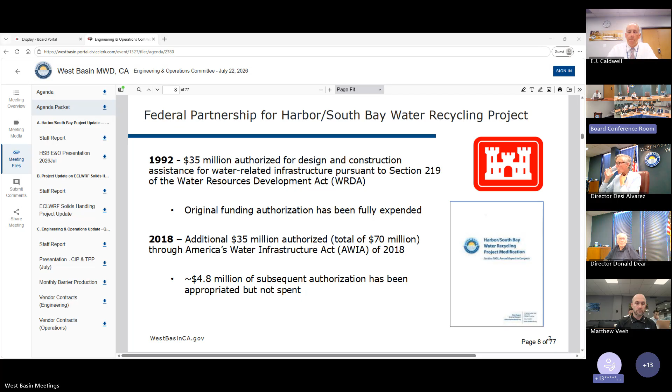Once we do the design, we'll be able to know exactly what the actual alignment will be. Next, yeah, the plan's already on there. Let me see the executive summary.

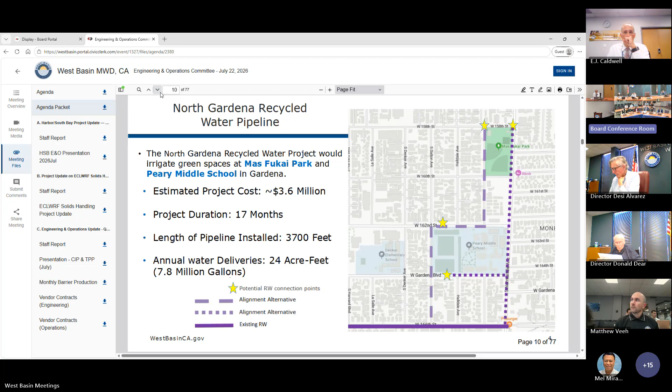To fund these projects required assembling together a number of different sources. The major portion came from federal funding appropriations of $4.8 million. However, that program requires a 25% local cost share, so we made up that cost share by securing some state grant funding through the Department of Water Resources, as well as some local funding commitments.

So this funding source, the state grant, is the one at risk now, and that's why we're presenting this item this month. Just to go through the details, the state grant funding through IRWM Proposition 1 Round 2, we received a $1.3 million grant from DWR.

This was a disadvantaged community involvement program project. This is important because normally there's a 50% cost share, so we would have had to come up with $650,000 of our own. However, because of that specific program, that cost share is waived, so we get the full $1.3 million without having to do any additional cost share.

Several years ago the board authorized the submittal of the application and accepting the terms of the grant, and since then we've been submitting quarterly updates as part of this grant. Obviously there's been very little progress, and that's why LA County has brought it to our attention that we need to make progress on this source of funding, or they could potentially take the grant away from us.

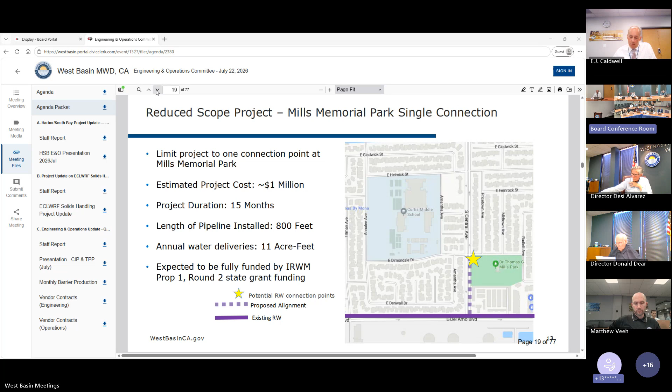The grant right now is for 1.3 million. The 1 million seems to cover the work there. So, having other contributions from potential aids might be able to help us to fully fund the project.

So again, this is just a rephrasing of what Matt had already mentioned. The SPL, that's basically the Army Corps of Engineers at the Los Angeles district level, has already completed the review of the letter report that originally included the alignments from North Gardena and Mills Park. So the engineering department has already signed off on those. And it's at the commander level, the South Pacific Division (SPD), where the final signature is pending. We do not know when the agreement is going to be signed.

So the funding for the rest of the alignment on Mills Park, from Mills Park to the school and to North Gardena, at this point will basically be unknown.

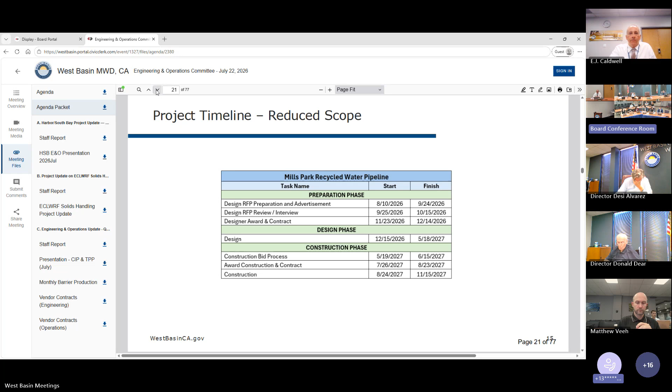Trying to see if we could meet the requirements from the grant if we were to proceed forward with a reduced scope, meaning just the alignment that goes from the connection point to Mills Memorial Park. It seemed like we definitely could meet the deadline that the grant has for us to spend that money, having completion basically by the end of 2027, just focusing on that portion of the alignment with reduced scope of work.

Okay, so just a couple last slides here. At this point, this is staff's perspective on what our options are. One is status quo, so we continue to wait for the Army Corps to finalize the agreement.

Even with the extension that requires the full project to be designed and built by June 2028, I think that's possible, but probably not likely. To get that done within less than 2 years puts a lot of pressure on us and Army Corps to make that happen. With that option, the drawback is that it puts our state funding at risk if no agreement comes forth in the next, I'd say, 2 months. We really have maybe 2 months, 3 tops, where if we don't show progress, the state will take that funding away and put it to another project.

The other option is the reduced scope that Veronica talked about. It would be limited to the Mills Memorial Park connection, the one connection site. It utilizes the 1.3 million state funding that has no cost share. We have the environmental in place, so it should be a pretty quick timeline, as Veronica talked about. The downside is that it gets rid of that source of funding, and it's no longer available to us in the future, and we'll need cost share if we want to do the rest of the federal project.

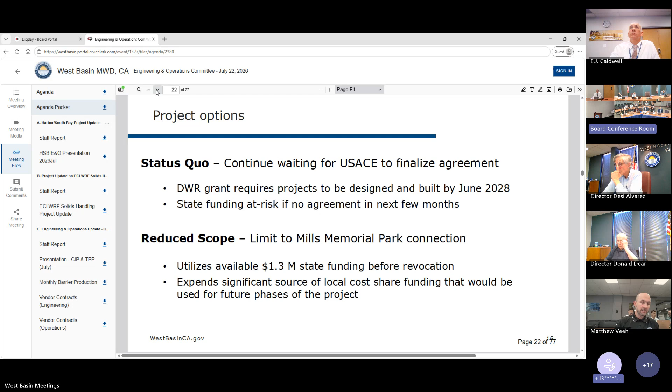Next slide, last slide here. So staff is seeking feedback and direction as to which project option to pursue. If there's a third option out there that comes to mind, feel free to share that with us as well. But these are the two primary ones we have before you today. So with that, we're happy to take any questions and let the board discuss and provide feedback.

And Mr. Chairman, if I could add a couple of things. First of all, what you're seeing today and hearing is staff bringing this to your attention because we don't want to see - a lot of work goes into securing grant funds and the partnerships. The committee and board really gave us specific direction to go out and seek 100% funding for us to move forward with these two projects.

We are very proud of the work that went into it. We're there, but we're now facing some challenges that we weren't anticipating.

We're bringing this to you because we want you to know that the $1.3 million is at risk. I want to stress this: we would continue to coordinate with our advocacy teams and our state and federal representatives if the direction is to maintain the status quo.

This would include a bigger and broader approach. I would be working directly with LA County Public Works, Mark Pestrella, so I would go straight to the top to really put pressure on them to secure that funding.

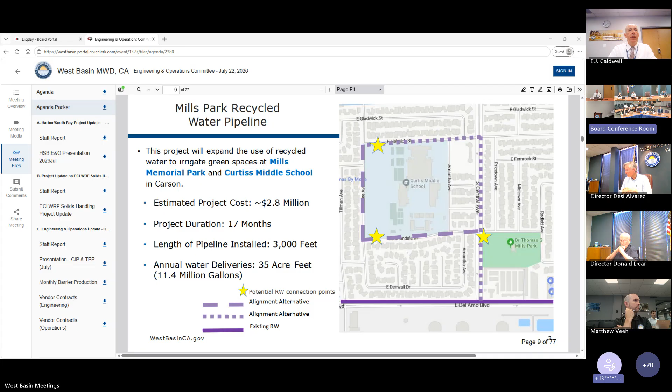The two items would be to maintain the status quo, wait and work with the U.S. Army Corps, and hopefully move forward with that funding, and hopefully the Department of Water Resources funding would still be there. But because we're concerned about losing that money, the other option is to reduce the scope, and staff would work with LA County, DWR, and the U.S. Army Corps to ensure option feasibility, and pursue design and construction procurement for that reduced scope.

So losing the money from the Army Corps, is that what you're saying, losing that funding? Well, with the reduced scope, we'd be moving forward without the U.S. Army Corps, but we would continue to work with them with the hope of getting it at some point. Make sure I stated that correctly, Matt. Okay.

So moving forward with the project, which is a little bit different than we originally wanted to do, versus waiting for what? I'm still trying to understand the two options. Tell me, U.S. Army Corps, we have a draft agreement. It needs to be authorized by the administration and move forward, and without that happening, we don't believe that the funding from the U.S. Army Corps would come to fruition.

Okay, I got it now. I would say move forward with what we have. I don't think the funding is guaranteed for the next few years, so I would not wait for that. If it's possible that we may lose our other funding, I would move forward with the project.

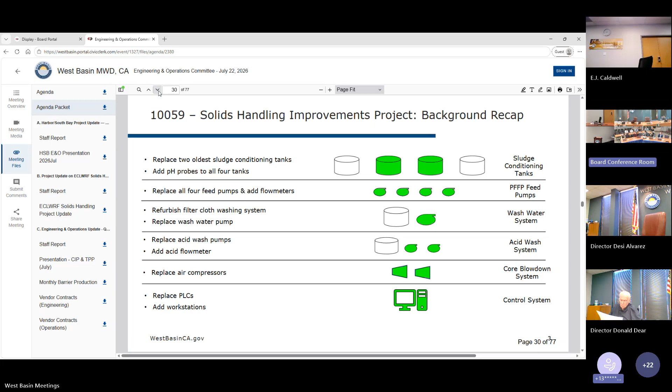This slide recaps the project scope. I think this is a recurring slide for all, so I'll move on to the next slide unless the committee would like me to go through the aspects of the scope.

I'll quickly highlight some of the construction progress through these photos from our inspection. Back on June 16th, we had a planned electrical outage for installation of our UPS, which supplies backup power to our control system. We've also begun installing quite a bit of conduit and electrical equipment. You can see on June 19th some anchorage of electrical disconnect switches, specifically for our new diluted acid pumps.

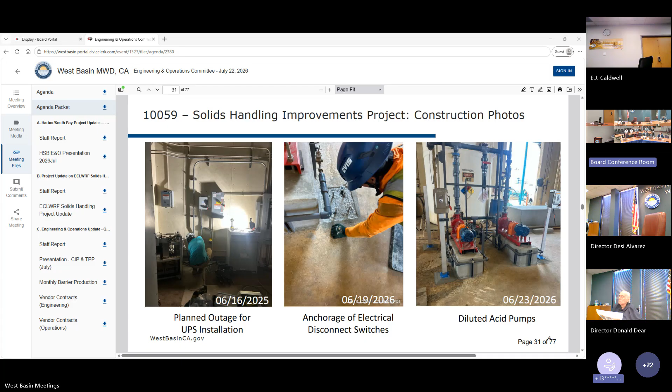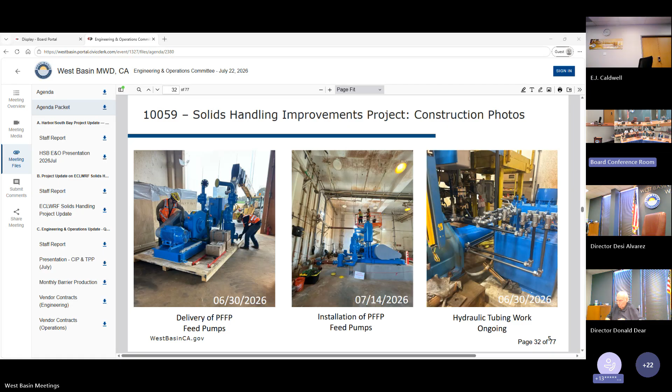Some more progress: we took delivery of one of our biggest equipment items, the new feed pumps. These are oval feed pumps that came from Germany and will supply the presses with the sludge. We've proceeded with installation of those pumps, the anchorage, and the associated piping as well. In addition, at the presses we've had ongoing hydraulic tubing installation, and we're beginning to get ready for commissioning.

I did want to highlight the 5 owner-furnished POs that we have as part of this project, 3 of which are basically complete, while 2 remain open. The first is Pace Dewatering Systems, who's providing the temporary dewatering system to support the solids handling operation at ECL while we rehab the solids handling building. That PO is roughly $1.1 million, about 70% expended, and we will have the temporary system online through the beginning of November this year.

We have Universal Filtration - all of the equipment components have been received and installed on the presses, with the only outstanding item being some startup support services through the vendor. We have a completed PO from Blue Angel, who provided breakers for the temporary dewatering system; that's been received and installed. We have a PO with Arnaz Construction for the 2 sludge tanks, which I'll highlight in the coming slides. And finally, we have a complete PO from Advanced Systems Co., who supplied an odor control system for the solids building.

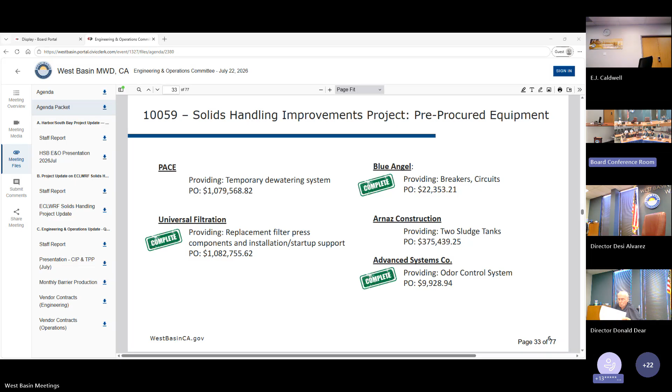For our welded steel tanks PO, we have an open procurement for 2 21,000-gallon welded steel tanks used as part of the sludge conditioning process. These were pre-procured by West Basin staff with an award in August 2024, a low bid award with a planned delivery of September 2025. You might recall we came to the committee back in April to highlight some of the challenges we were encountering with the delivery of these tanks and the need to supply supplemental inspection services to help with QA/QC and ensure that the district was going to receive quality tanks.

The engineer's estimate during the design phase for these tanks was $416,000, including delivery and taxes. Ultimately, our PO with Arnaz sits at $375,000 currently, which also includes delivery and taxes. To date, based on progress of the tanks, we've paid about $311,000, with about $64,000 remaining.

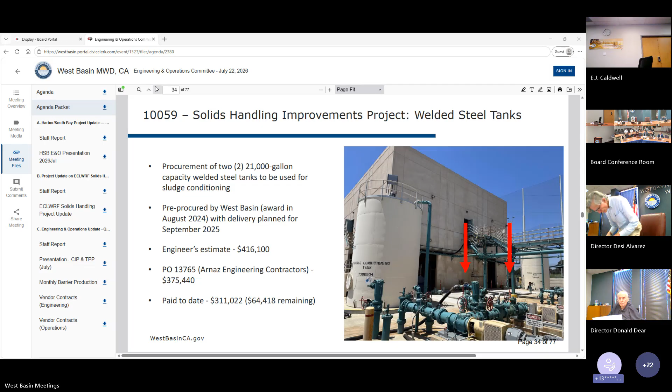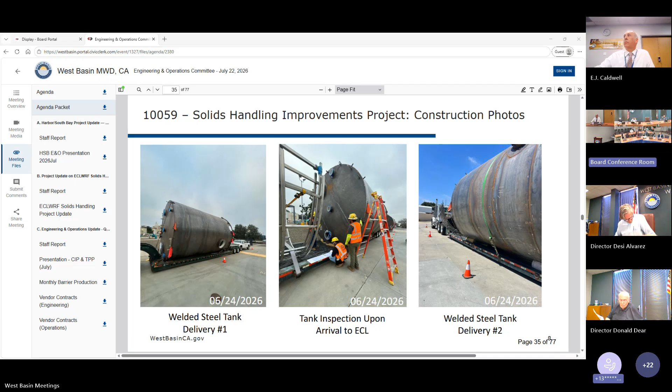Following the supplemental inspection services we provided in May and June, we continued to struggle with the manufacturer providing untimely updates, poor communication, and even accessibility for our inspectors to inspect the tanks. Ultimately this culminated in Arnaz taking the tanks from their manufacturer and bringing them to the site at the end of June. They got to ECL on June 24th, and we inspected them upon arrival. I did want to highlight that upon receiving them, they were noticeably incomplete and had some instances of non-conformance. So we rejected the tanks and issued a letter of non-conformance, and are working with Arnaz to complete the PO currently.

In the days that followed the delivery of the tanks, based on our rejection, Arnaz brought out their own crane and their own workers, since the work is still considered ongoing, to verify dimensions, finish up some of the outstanding work, and correct any deficiencies that we identified through our inspection team.

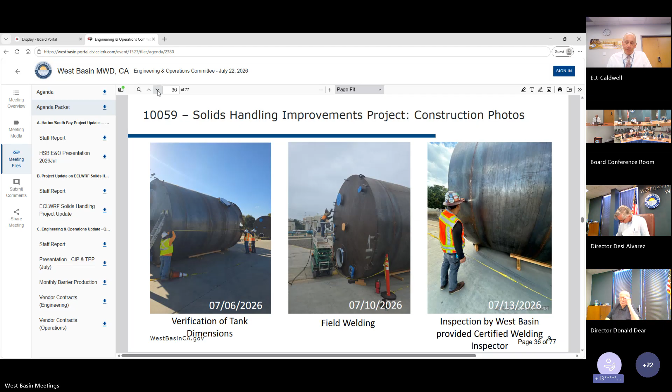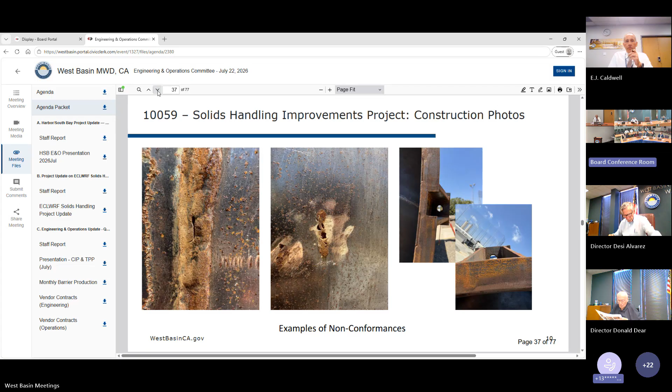Again, just highlighting some of the non-conformances and the before and afters. You can see there was some undercut welds and some pitting. All of these have been gone over and cleaned up.

Next slide, please. So in terms of West Basin actions, I highlighted our formal notification of nonconformance and rejection of the tanks. This was sent out on July 2nd.

In the preceding days, we've been coordinating closely with district legal counsel and just posturing ourselves so we can be best suited to see these tanks through completion in the best interest of the district.

So Arnaz has submitted a plan to complete the remaining work on site at ECL. This does present some challenges in terms of site constraints and logistics. However, we work closely with them as well as the Jacobs team to establish clear expectations and understanding of what those constraints are, with the protection of the health and safety of all people on site, our guests, and the operations of ECL itself.

Through that communication, we've set a deadline, which is very fair but tight in our opinion, of August 5th. That date was selected by using the language that is afforded to us in the PO terms, as well as what we thought was realistic without impacting the construction schedule. So that deadline of August 5th has been set.

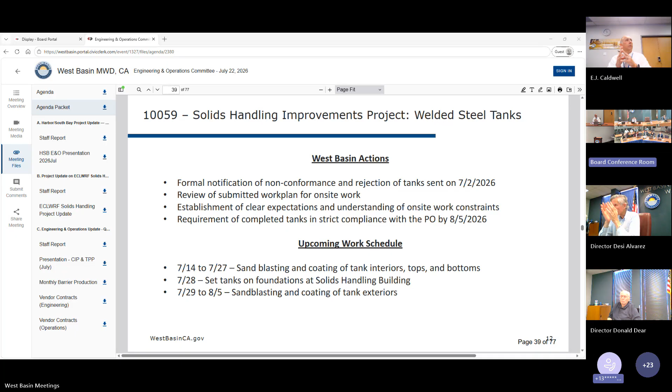But what they're really trying to do is, as shown in one of your previous slides, before and after, so when we had issues with the welds, they brought in and corrected those welds. So that's what's happening, and Arnaz believes they're going to be able to deliver the tanks per specification. Correct. They were very reliant upon a manufacturer, kind of a mom and pop shop up in Fresno. They have now taken the tanks in their possession and are self-performing the remainder of their work as they are contractors and have built projects for us like the PV pump station.

So I'm glad to see that you guys issued a notice rejecting the tanks. But, you know, issuing a notice rejecting the tanks and really bringing in new tanks, there's a big gap there, and the contractor has an awful lot of rights in the process. Which then comes back to this whole issue of schedule. The tanks are probably needed for a while.

Is our general contractor comfortable? I think it's Hewlett, right, for this one? Is Hewlett comfortable that it's not going to delay their schedule? Yeah, in anticipation of this being a possible issue, and realizing Arnaz's late delivery of the tanks, months ago we started analyzing the construction sequencing and our ability to commission the project with or without these tanks, and we're confident that we will be able to get through the commissioning phase.

Should these tanks be delayed beyond August 5th, that date still doesn't impact the project schedule, but if it goes beyond that, we're confident we'll be able to commission the project without these two tanks. What we will struggle with is turning the plant back over to normal operations through the presses. Okay, so we can commission the project and put it in service without the tanks? It seems that way, we're still working through the logistics of that, but yeah.

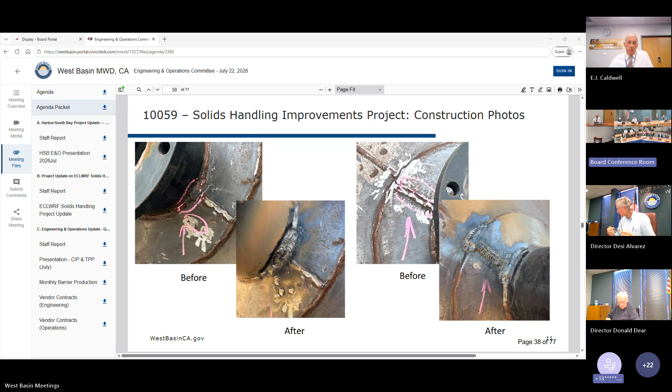Alright, so with that, if there's no other questions or comments, we will move on to our next item, which is the engineering operations update.

Yes, Mr. Chairman, gentlemen. For this presentation, as always, we do have a team here to present this item. We have Susanna Lee, our manager of engineering, Orlando Rodriguez, our engineering supervisor, Camilo Castillo, our engineer 2, as well as John Venner, our engineer 3. This item begins on packet page 41.

Good afternoon, directors. Before I go into the presentations, I just want to highlight a couple items from the memo. As we ended our fiscal year 25-26, I'd like to highlight that our production ended at over 90% recycled water injections for the last 3 months. Last quarter, we were actually consistently about 98 to 99% recycled water. So that is awesome news.

If you want to see the overall graph for the year, it's on page 74. There's also one item on the memo I just want to let the board know: the compliance team is discussing with the regional board to follow up on some missing data from JMM regarding the brine permit. So if there's anything worthy to bring back to update the board, the compliance team will do that in the August board cycle. With that, if there's no question on those 2 items, we can go to the presentations.

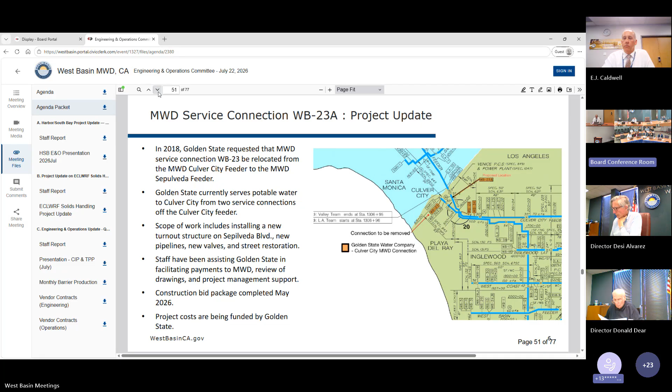Here's a quick project summary. One of the biggest milestones we had recently, which took longer than expected, was Culver City approval. That happened in March of 2026, and we were going back and forth on their traffic control plans. This is a large arterial, Sepulveda Boulevard, so there was a lot of back and forth in terms of lane closures, staging, and so forth. We recently got that approved by Culver City, which was the last big task in order for us to then complete the bid package, done in May of 2026.

MWD will be issuing a solicitation for construction services in October of 2026, with anticipated award of construction services in January of next year, 2027. So we're looking at a start around early 2027 and completion in early 2028.

No RFIs or submittals as of yet, but what I wanted to point out is at the very bottom of the estimated cost, MWD has spent to date $1.3 million, again Golden State funds. The approximate or preliminary construction cost estimate for this project is $4,067,600, with a total project cost of $7,336,800. I'll get more into that in a bit.

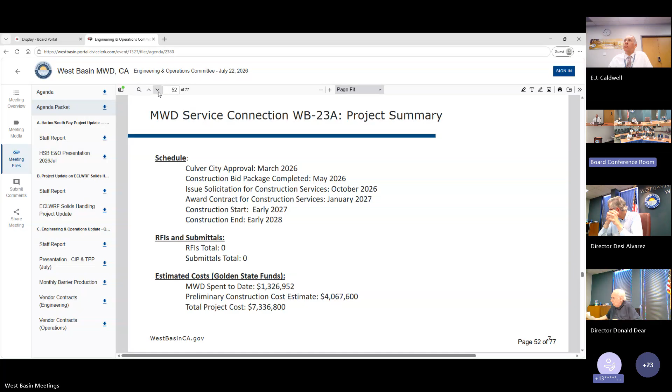Recently, MWD sent West Basin's general manager a letter requesting additional funds, in lieu of an anticipated shutdown scheduled for late next year. The shutdown cost is about $1.7 million, and that shutdown is absolutely necessary in order to achieve the tie-in to the Sepulveda feeder. Without that, there is no project. So we have scheduled around November of 2027 to do that shutdown and tie-in work.

We will issue a solicitation for construction services this year in October and start construction early next year. The goal is to do a lot of the upfront construction work ahead of that tie-in, essentially leaving the tie-in to the very end to do a lot of the legwork, then finish when we're ready to go. What's in that tie-in: the biggest factor is really draining that feeder, all the water in there, disposing of that, having an MWD crew dig that up, and then performing that actual tie-in itself. There's a lot of work in that, which is why it's about a $1.7 million request.

That was sent to the general manager last week. We're working right now on invoicing Golden State to request those funds, and they already approved that. They'll be sending those funds to West Basin, and we'll then be able to pay MWD with that. So the project completion for this overall would be early in 2028.

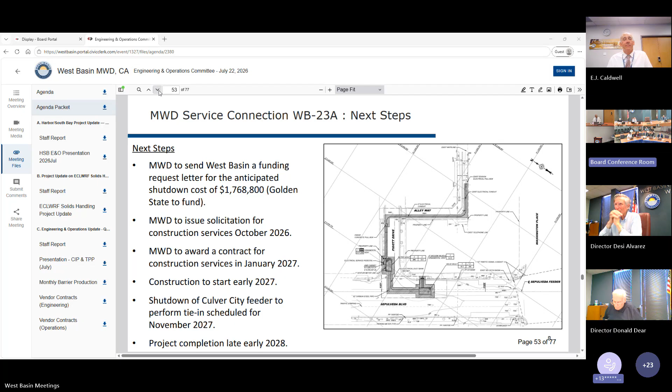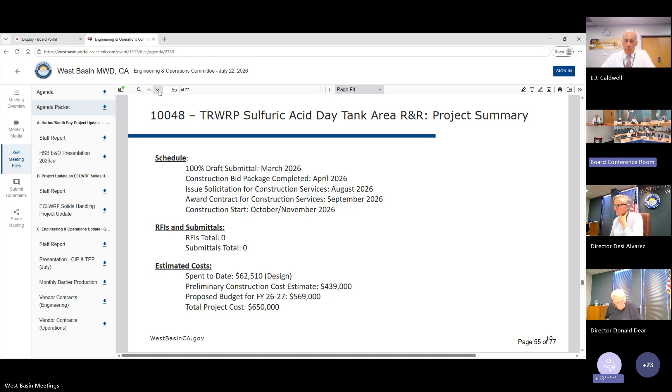Next slide, please. So just a really quick overview of the project itself. This is the chemical containment area, or at least the day tank area at Torrance for the sulfuric acid, which is heavily deteriorated, at least for the concrete.

So the scope of work is to install a temporary bypass system for injecting the sulfuric acid, which is key to producing the low pressure boiler feed for the refinery. After the bypass system is installed, we will remove all the existing equipment that's in there and essentially build the concrete containment area from the ground up again - the containment curb, the pads themselves, the pedestals for pumps, the tank itself, and the sump area. After that is completed, we will be reinstalling all of the equipment back.

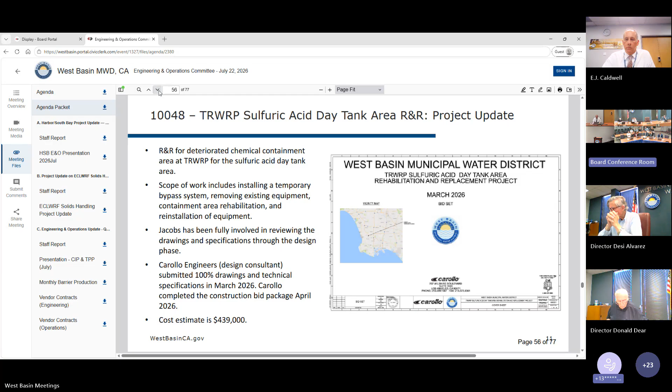So Jacobs, our plant operators, have been fully involved in this. I've been reviewing the drawings with those specifications and so forth, and really hands-on throughout the duration of this project. Again, Carollo, the design consultant on this, completed the bid package in April this year, and they provided their cost estimate, which was previously mentioned at $439,000.

Next slide, please. Again, I should have updated this, but we actually submitted this in OpenGov on July 6th to our OpenGov system. So we'll be recommending an award next month at the board meeting, with construction to begin in October. We always say time frame.

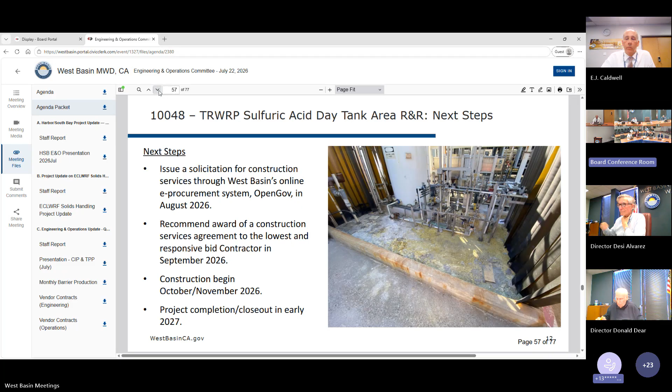If you followed along to page 59, I'll provide the project updates. This project, the Torrance Refinery Water Recycling Plant reverse osmosis product water tank potable water connection, has recently gone through a design solicitation via our existing on-call consultants. Of the 6 engineering firms we reached out to, we received 2 proposals on July 1st - one from AKM Engineers and the other from Tetra Tech. West Basin Engineering staff evaluated the proposals and selected AKM Engineers.

The design contract is for $139,364. That contract is still under processing, so the award has not been finalized. But I did want to point out that the fiscal year budget is for $103,000. However, this project is entirely refinery funded, so we do not anticipate any issues obtaining that funding. So the next slide, please.

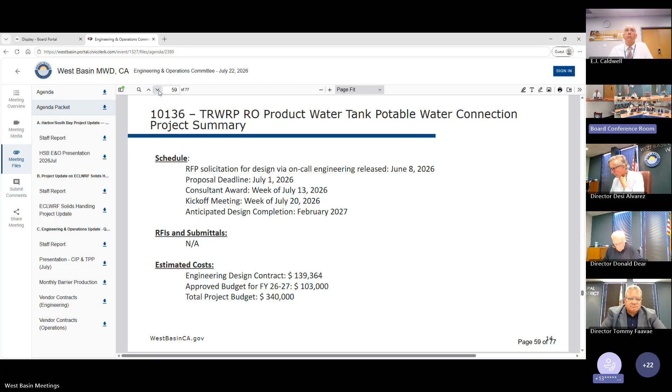The objective of the project is simply to provide operational flexibility and redundancy when the low pressure boiler feed system is offline. The scope of work is to design a potable water connection from the potable water inlet to the reverse osmosis product water tank at Torrance. The design consultant will be preparing a technical memorandum that will evaluate alternative pipeline alignments and potential methods of receiving or providing supplemental water to the RO product water tank. Based on the chosen alternative from that memorandum, the consultant will prepare a design bid package.

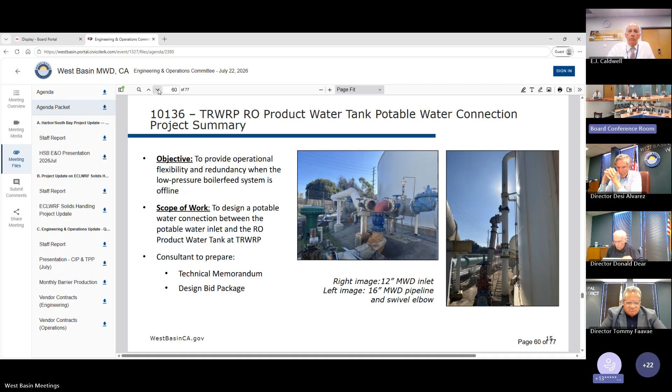On the next slide, you'll see that the next steps are to complete that technical memorandum by September, and eventually the design bid package by February. That concludes my presentation.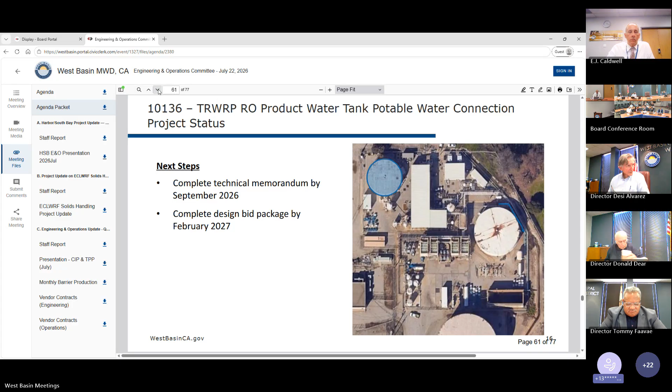Any questions? Mike? None.

Dr. John. Okay, good afternoon, directors. I've got here some updates on the DCS replacement project, starting on packet page 63. So here's the summary for this phase of the project.

So far, we're on schedule. We're quickly approaching our anticipated GMP, our guaranteed maximum price, in September, which we'll aim to present to the board in October. In the last year, we've processed 13 RFIs and 49 submittals, with another 5 submittals still under review.

We are also on budget, and we're anticipating this phase of the project will end fully within the original budget. I mentioned it last month, but we did have some cost overruns early on in the project of around $100,000. We've effectively managed the rest of the project to bring it back within budget, so we don't anticipate spending any of the contingency for this phase.

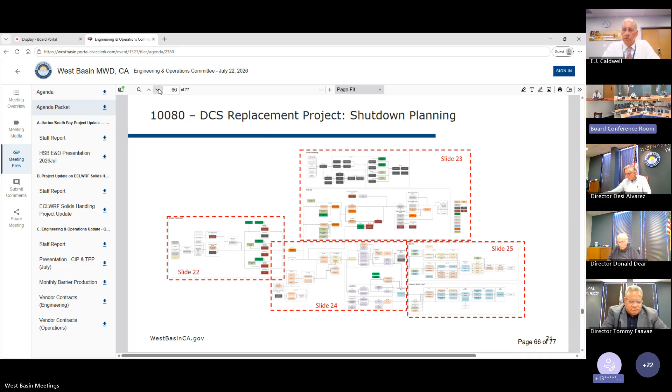Here you can see the main areas where we separate the system into. These represent distinct processes. However, even these are interconnected through the control system, as you can see from the same colors popping up in multiple areas.

Zooming in, still a little blurry on this screen, but this area is the waste treatment process, the backbone for any treatment requiring the use of water from Hyperion. Part of our shutdown planning is to bypass this area initially by inserting potable water further down the system, allowing us to cut this area over to the new control system.

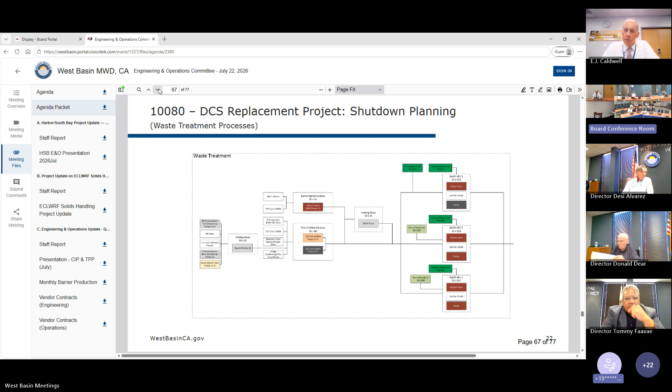The solids handling area at the top is at the end of the waste treatment process, and so will be initially bypassed while we use potable water. The Title 22 system is required for our satellite plants and distribution system, but it's also required to process the waste from our microfiltration trains, so it affects every other process. Unfortunately, it's one of our oldest areas on site, and so will require the most work to manually cut over.

This area is an intermediate area used both to move water through our system, but also to prepare water for further treatment in our barrier and boiler feed processes. Bringing back up the Chevron boiler feed as quickly as possible is critical for our shutdown plan, it's our main priority, so this area will be one of the second or probably third areas we bring back online. In the meantime, we'll be feeding potable water into the Chevron boiler feed system by inserting potable water into the MF Filtrate Clear Well, that blue box at the bottom right, effectively bypassing this area until we bring it back online.

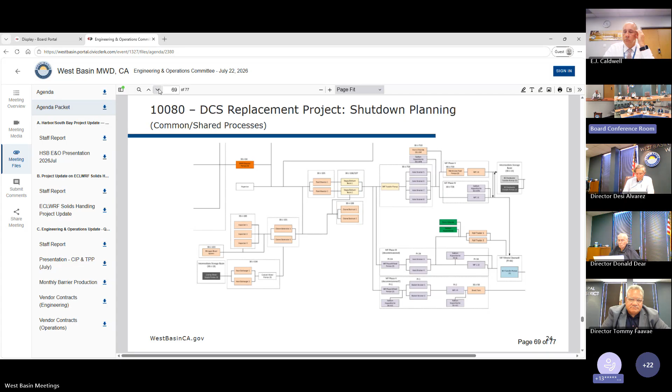And here you can see two of our customer-specific processes. At the top is the barrier. This process will be shut down for the longest period, as the barrier can receive potable water directly from Metropolitan without any input from ECL, which takes the load of that system while we're maintaining water requirements.

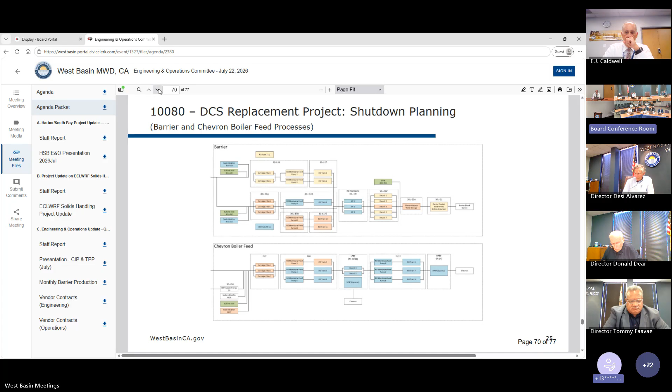The Chevron boiler feed is the opposite. The refinery relies heavily on this water, and therefore the system is the most critical in our shutdown plan, and we're aiming for minimal disruption to that refinery. The only change will be a reduction in flow as we move to potable water input into our RO system. Next slide, please.

As I mentioned, these shutdowns are anticipated in late 2028 or early 2029, so that we can avoid both the Olympics and the high demand summer months. We're currently anticipating a total duration of around 8 weeks, with systems coming on and offline during that period. The first of these is barrier production, which will be fully offline for the entire 8-week duration. It will be the first system taken offline and the last to come back online.

Our refinery customers won't see full system shutdowns, but they will see reduced flow for around 6 weeks as we use potable water to replace our recycled water treatment. Our irrigation and commercial customers will likely see a full shutdown for around 6 weeks. However, we're currently looking at options such as intermittent service, temporarily cutting customers back off purple pipe, and even working with the county to try and supplement the system with potable. Those are the potential customer impacts we're tracking at this, again, very early initial planning stage.

Over the next few months, we'll be working with the contractor to lock down the exact schedule and duration for the shutdown window. I mentioned that the schedule and duration has to be locked in the GMP as part of the requirements of the contract. Once we have that window, West Basin staff will work with Jacobs to reduce the impacts wherever possible for the implementation in late 2028, early 2029.

In addition, West Basin staff are assessing the opportunities this shutdown might bring. We've only had one other planned recycled water shutdown since we started up, and that was only a week long. So there's a huge backlog of projects such as valve replacements, force main inspections, etc., that we may be able to do during this shutdown to make our system more reliable and efficient when it comes back online.

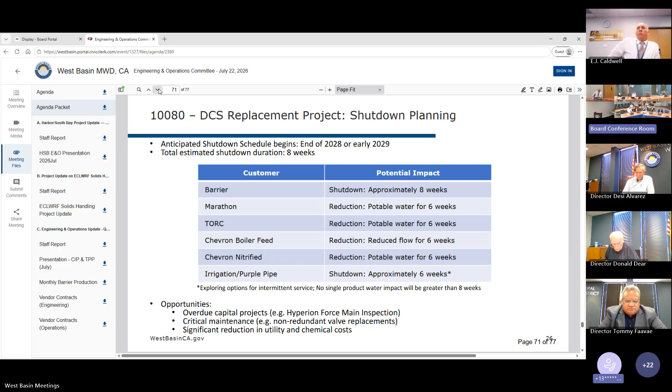As I've said, this is all in the very early planning stages. We've literally had 3 or 4 meetings on this so far. But we want to make the board aware of these potential impacts as soon as possible, and obviously we'll keep the board updated as we move through this planning stage. Next slide, please.

Any comments? Engineer, any comments? No. Director Dear, any comments? No, I will- no, thank you.

One question and request on slide 19, page 64. So we went with the less expensive system. Can you provide us with what were the systems that were evaluated, 2, 3, 4, however number, what the costs were for each system and what the support subscription costs were for each system? Yeah, absolutely, I can provide that in a future update. If you could send that, I know you don't have that right now. Yeah, no problem, I would like to see that. Okay, so let's see the whole committee gets it. We should all get those communications.

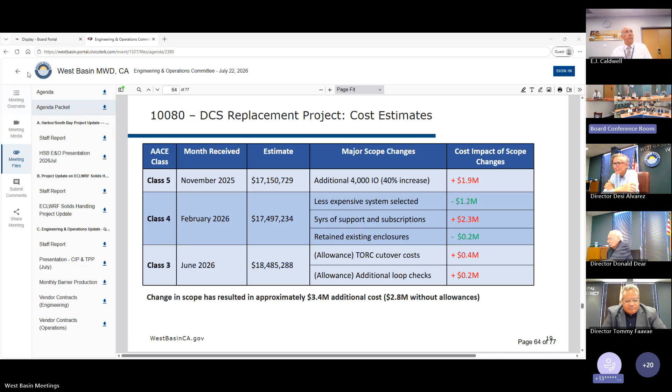And then moving on. That's it? Okay, well, thank you. With that, I think we don't have a closed session. And do we have any director's comments?

Things are probably being run very efficiently. And thank you, this is Director Dear, and thank you to staff for all their reports this morning, this afternoon. Thank you. Okay. Thank you, staff. All right, thank you, everybody. We are adjourned.